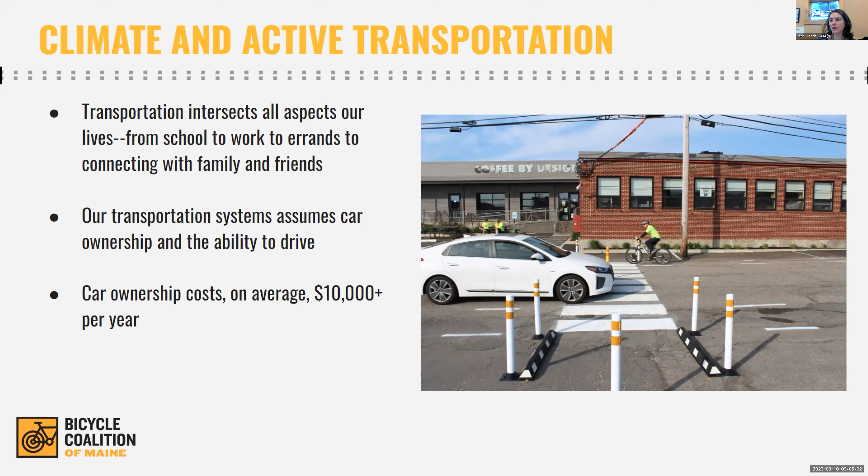Here in Maine, transportation accounts for about half of all of our carbon emissions, and of those, about 60% actually come from passenger vehicles. So the Maine Won't Wait Climate Action Plan, which I'm sure many of you are familiar with, has several key strategies in it to reduce emissions in the transportation sector. One of those is to reduce vehicle miles traveled by 10% by 2025, which is only 2 years away, guys, and 20% by 2030.

Some good, ambitious, but I think doable goals there to really get us out of our cars and reduce vehicle miles traveled. Another exciting plan: the state of Maine, for the first time ever, has created a statewide active transportation plan. The draft of it was released in late 2022 and is nearly final, but it really lays out a vision for supporting and investing in biking, walking, and other human-powered transportation. A really great step that the state has taken to lay out a vision for us here.

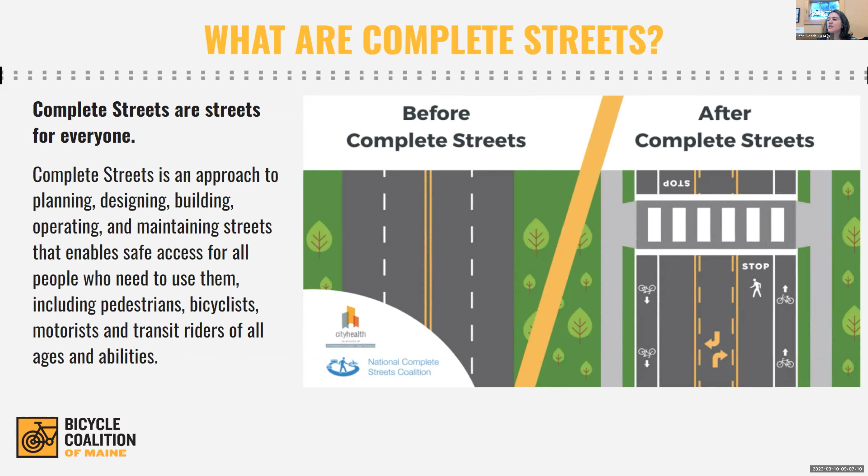And on the right side, you see we've reduced the number of vehicle travel lanes, added bike lanes, a crosswalk, sidewalks, and it's not only given space for other people outside of a car to utilize, but it also slows traffic down, which is really important for improving safety. So it's, at its core, a very simple approach to thinking about how we design our transportation infrastructure to support lots of different users.

And there's a lot of really great reasons why this investment is valuable to all of us. Top on my list is improving public health. One of the things I really love about being able to bike into work is that it embeds that activity in my daily routine, right? It allows you to have these walks or biking as part of it, and sort of gets that exercise and physical activity really as a core part of your day. And of course, reducing pollution and improving air quality.

And really improving the safety of our streets. Last year in Maine, we had record high roadway fatalities, and we're seeing this nationally as well. So there's a lot of work that we need to do to make our roads safer for everybody that's using them, but particularly for what's often referred to as the vulnerable user, people outside of their vehicles.

It also can be really valuable for economic development. Not only does it help people who are unable to drive, due to disabilities or low-income households, this design approach gives other ways to move around, allows people to get to work and have some economic independence in their lives. It really fosters communities and higher quality of life.

If you think about when you're walking or biking through a community, the way you can observe it and interact with it around you. Every time I'm on a walk or on a bike, you wave at your neighbors, you maybe stop and say hi, you pop into a shop. It really fosters a connection to the place that you live rather than just a drive through it. And I think that's really important for our communities.

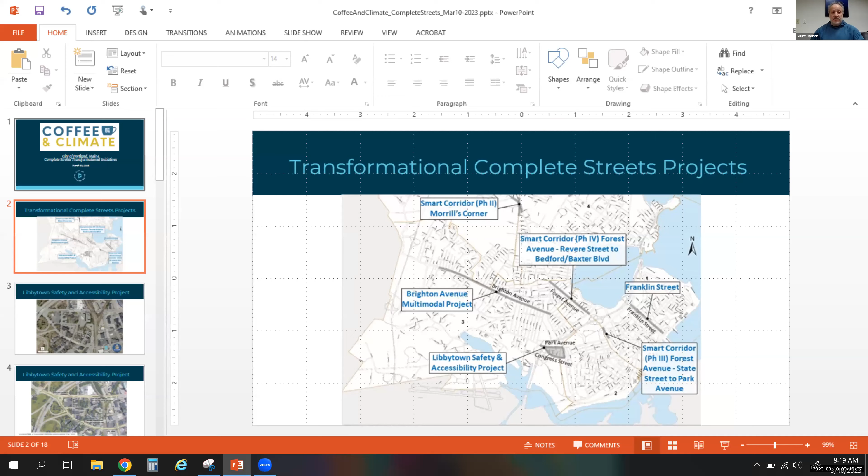Sounds good. Thanks for inviting me. I'm Bruce Hyman, the Transportation Program Manager in the City of Portland's Planning and Urban Development Department. I'm going to take you through some work that we're doing under the topic of today, complete streets, and hopefully my screen is going to be starting soon. Let's see.

Perfect. So Jean talked about complete streets and how some of the ways that we can transform some of our local streets and urban streets into more complete streets can be done in a more tactical and lower cost way. We do that in Portland, but I'm going to focus on a number of the more complete streets transformational types of initiatives that we have, and then close with a little bit of information on some of the work that we've done. I've got probably too many slides, so I'm going to move through them pretty quickly.

We went to the City of Planning Department and Public Works, went to the Sustainability and Transportation Committee Wednesday night to give them an update on some of our transformational projects. Six of them are noted here. I think I'm going to talk about three or four of them pretty quickly. But we've really been focusing a lot on Forest Avenue in the last 5-6 years.

If you know that, it needs a lot of work to become a complete street. We've been doing some of the more incremental stuff, paving projects and stuff, but we've got three active transformational initiatives, and I'll go through a couple of them: Brighton Avenue, then Libbytown, and then Franklin Street. I won't talk about that one - that one's an animal all unto itself.

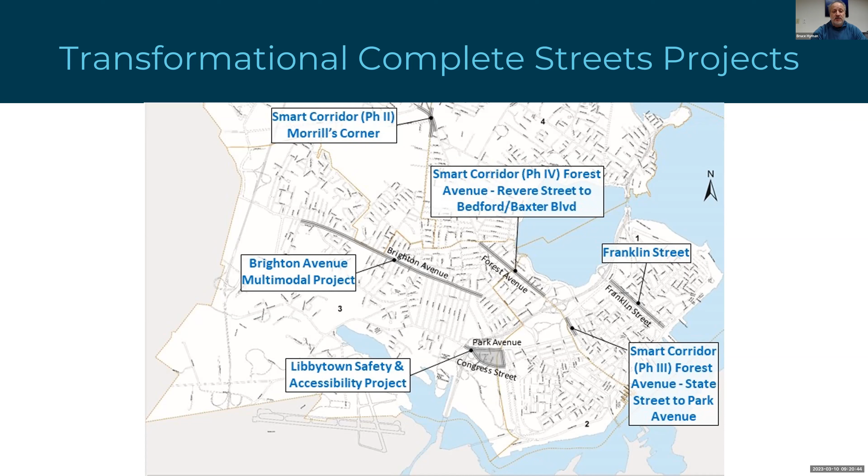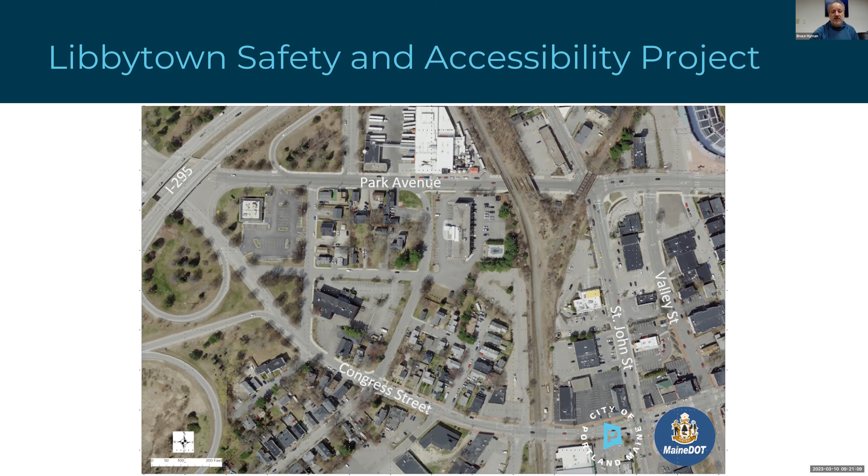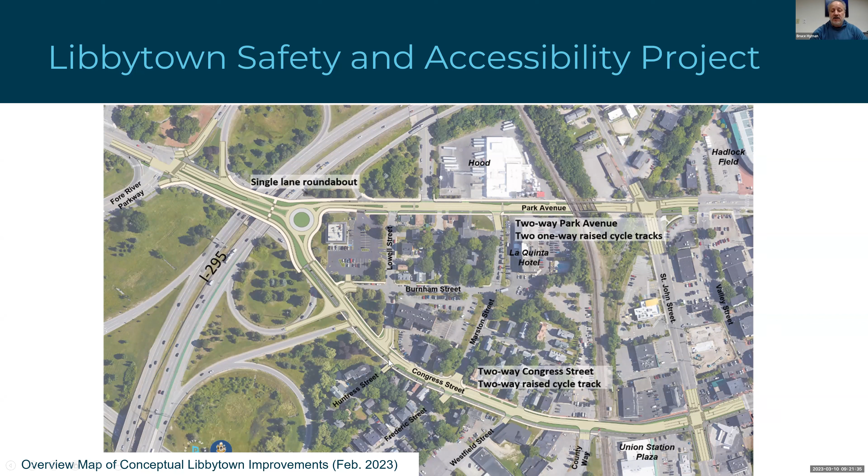Libbytown Safety and Accessibility Project - if you're familiar in the I-295 exit 5 area, Park Avenue and Congress Street are a 2-lane one-way pair. Just about every street segment and many of the intersections are high crash locations, and also have pretty bare bones bikeway facilities on both Park Avenue and Congress Street. So we're looking to, in partnership with the Maine DOT, retrofit much of the area in terms of converting Park Avenue and Congress Street to 2-way, introducing a roundabout where those 2 streets will come together, really upgrade the streetscapes of them. And as you'll see, we're looking to elevate literally and figuratively our bikeway design game in terms of introducing raised cycle tracks, both on Congress Street and Park Avenue.

On Congress Street, we're looking at introducing a 2-way cycle track on the south side of Congress Street that would go basically from within the project limits from Valley Street over to the Fore River Parkway, where we have a shared use pathway along the Fore River Parkway. So it's a pretty ambitious project.

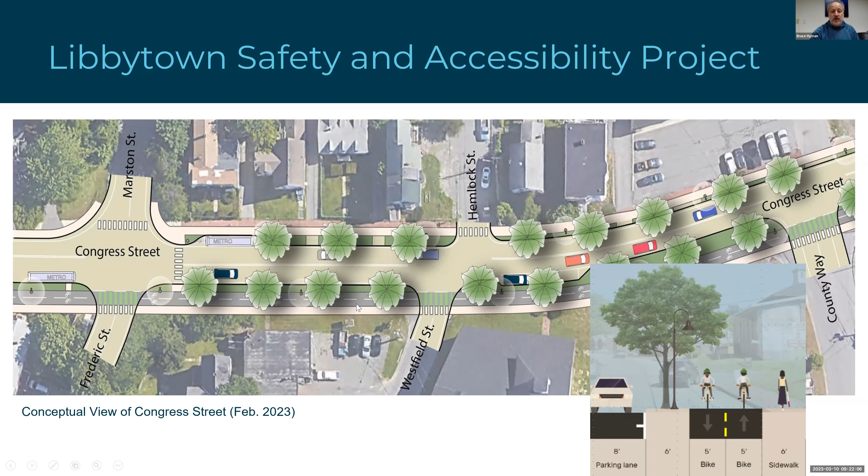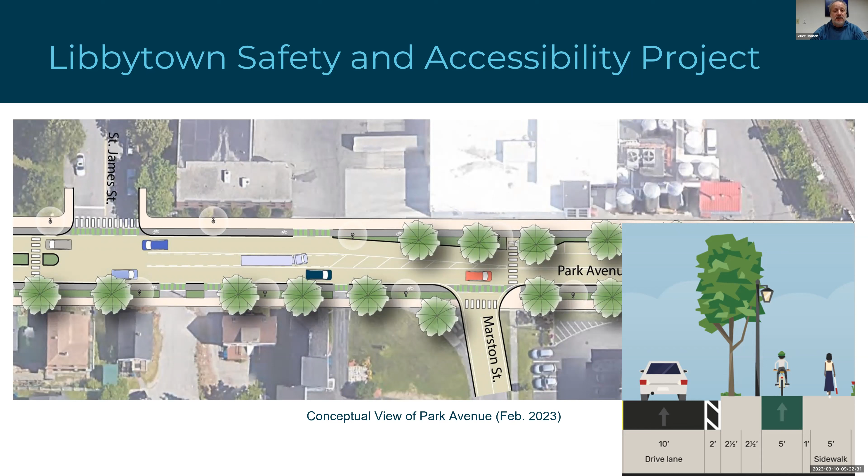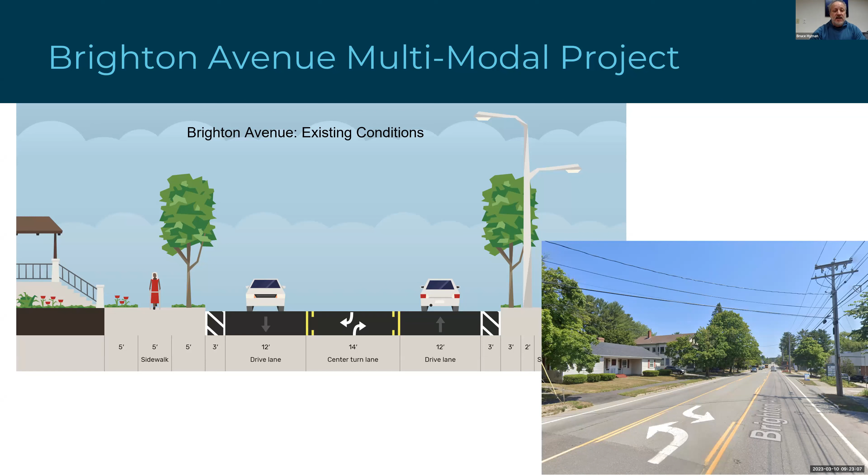I'm going to talk about Brighton Avenue multimodal project, basically from just north - just west of USM on Brighton Avenue - up to almost the Westbrook city line. Right now, it's a pretty bleak scape in terms of biking and walking. In some sections, there's kind of the two travel lanes with the center turn lane, but no bikeway facilities. Pretty poor streetscape and sidewalk conditions as well.

In an interim condition, with the money that we have in an impending paving project, we're looking to introduce buffered bike lanes and also enhance the streetscape, increase pedestrian crossings, access to transit. It's a very active transit corridor, and we have a rapid transit study going on that is looking at how we might retrofit the corridor with a high frequency, high quality transit operation from Gorham, Westbrook, and Portland, and Brighton Avenue is one of those possible candidate corridors that we're looking at.

If we're able to achieve and get and apply for some of the new federal money that's available for transformational type projects, we have a more aspirational type of bikeway facility where we'd like to have a two-way cycle track, sidewalk level, running along the length of Brighton Avenue.

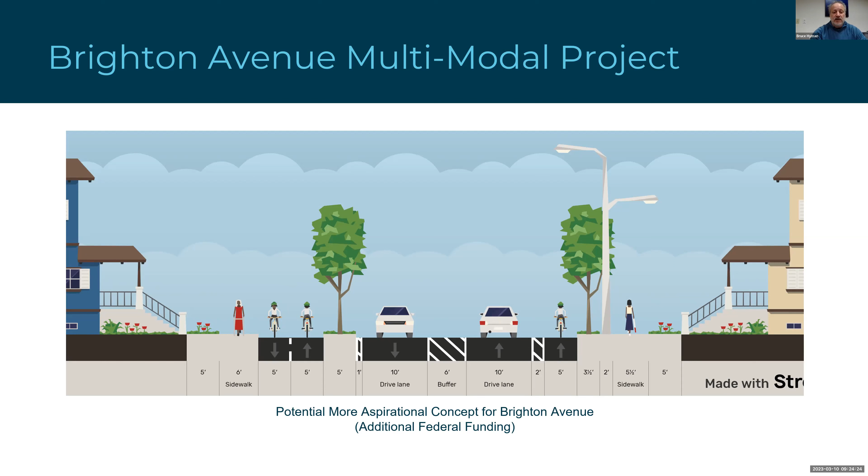And also, again, with those enhanced streetscapes and transit access features as well, but focusing on the bikeway features here in this presentation. In 2018, we completed the so-called Smart Corridor Study, which looked at Forest Avenue in Portland.

State High, and then across the Casco Bay Bridge, along Broadway into South Portland. It was a very ambitious study.

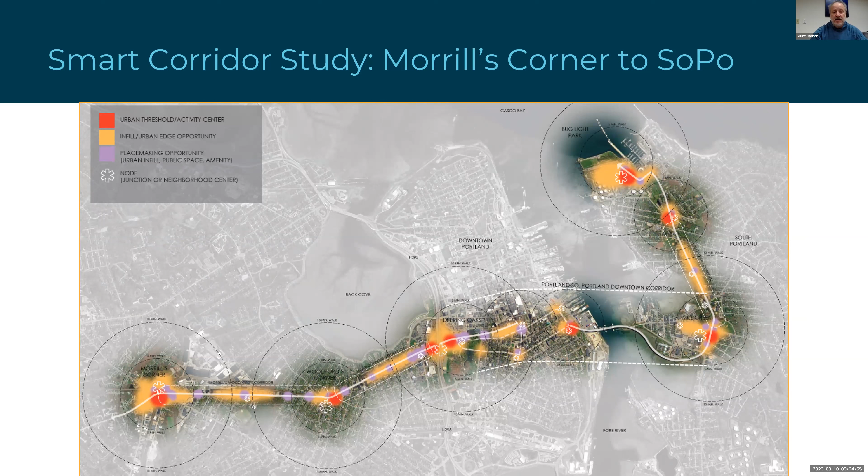I'm going to focus on some of the Forest Avenue outcomes from that, but we're picking away at it. We implemented phase 1 a couple of years ago in Woodford's Corner, and now we've got phase 2 looking at Morrill's Corner. Again, another pretty bleak streetscape with no bikeway facilities through Morrill's Corner, but with some connecting bikeways on Allen Avenue and to the south on Stevens Avenue, and some on Forest Avenue south of Morrill's Corner.

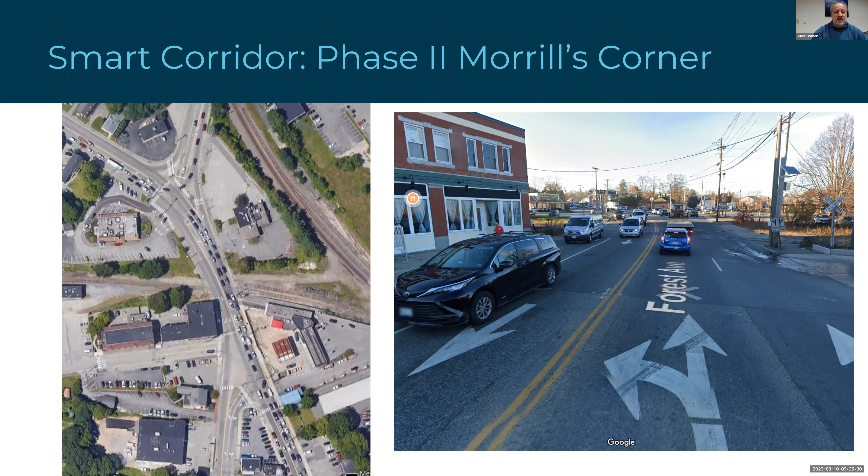But we're really trying to address this pinch point, which has been highlighted as a safety issue for cyclists for many, many years, as well as a safety issue for pedestrians in there.

Our concept is to bring raised sidewalk level cycle tracks through the area, really enhance the streetscape, redesign how Stevens Avenue comes into Forest Avenue, and create a plaza, making things more accommodating for all users. Right now, transit access is really difficult through this area, and we're looking at bringing transit stops within Morrill's Corner as well, so that you can actually transfer between the 9A, the 9B, and the number 2 bus. So really looking at all modes in this transformation.

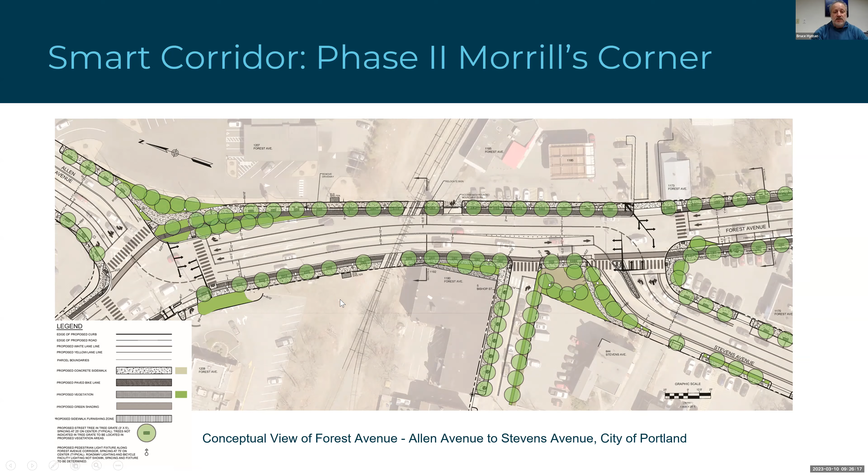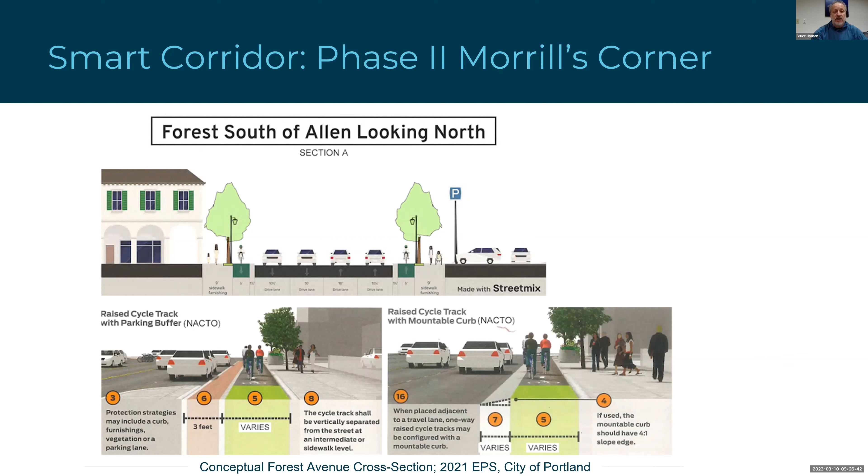These are some cross sections of those sidewalk level cycle tracks that we're looking to bring into the intersection, and hopefully we'll be able to continue them further south and to the north once we get through with Morrill's Corner. But we're picking away at things, and these are all $5 to $10 to $15 million projects, so we've got to do them in segments.

A little bit more to the south on Forest Avenue, from Woodford's Corner to the USM exit 6 area, again there are no on-street bike facilities for most of this way. The streetscape is very lacking in terms of there's no forest in Forest Avenue. So we're looking to enhance transit access and add more pedestrian crossings across Forest Avenue.

Part of that is going to be, we hope, a road diet where we eliminate one of the travel lanes, similar to what Jean presented in one of her slides, in terms of introducing a center turn lane. That would give us the opportunity to introduce, at least in the short term, a two-way cycle track along Forest Avenue, and also enhance the streetscape.

A goal in all of these projects is safety, pedestrian safety across the street, but also safety and accessibility to transit stops along this high frequency transit corridor.

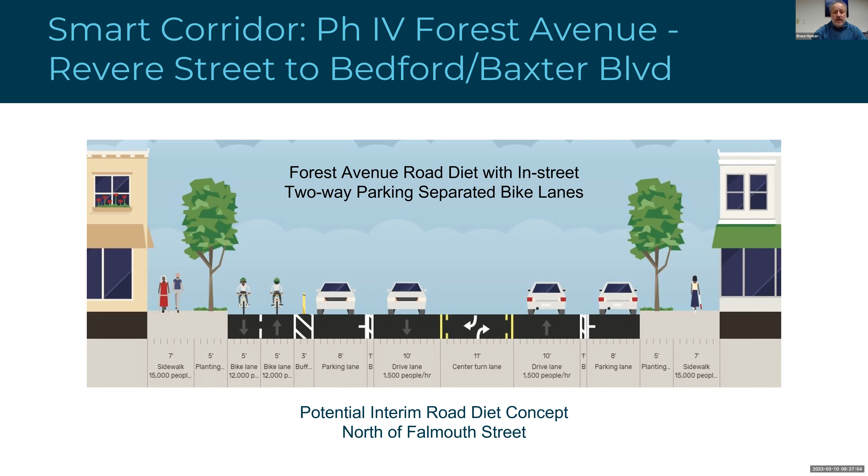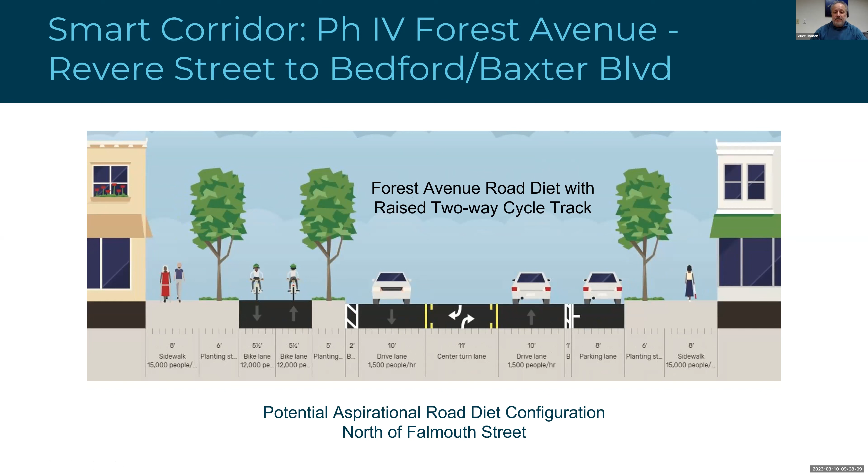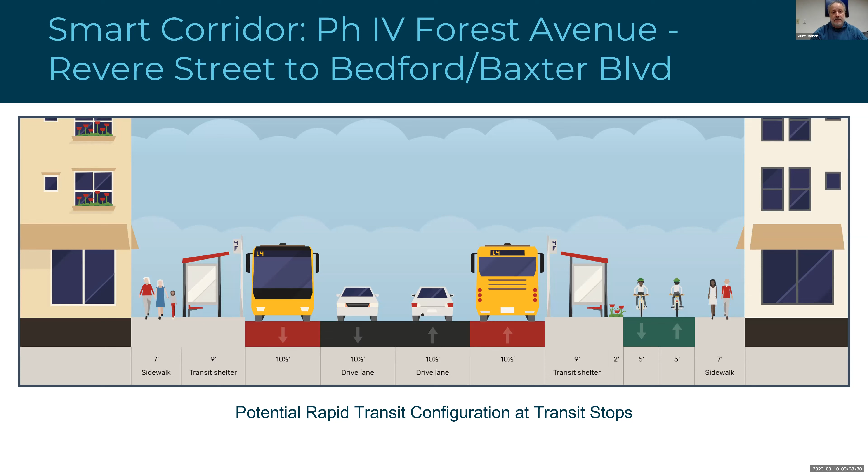More aspirationally, if we receive some of that congressional funding that's available that everybody's chasing after nationally these days, again $5 to $10 to $15 million required for these types of projects. Forest Avenue is also being looked at as one of those rapid transit corridors. So this is kind of the soup to nuts type of complete streets project where you're actually able to introduce dedicated transit lanes, raised cycle tracks, and enhanced streetscape elements as well. So we're going for it on a few of these corridors.

So those are just an overview of some of our transformational projects that we're trying to advance in concert with the Maine DOT. Those are multi-year initiatives and multi-million-dollar initiatives, but we also look for ways to incrementally and opportunistically enhance our streetscapes and complete streets.

Last year we initiated our Better Bikeways initiative, where we've got some of the more bare bones bike lanes on some of our streets, lacking in pedestrian accessibility across some of the streets. If you want to see some of the things that we're doing there, the URL is at the bottom of the screen. And I'll pass it back to Cashel.

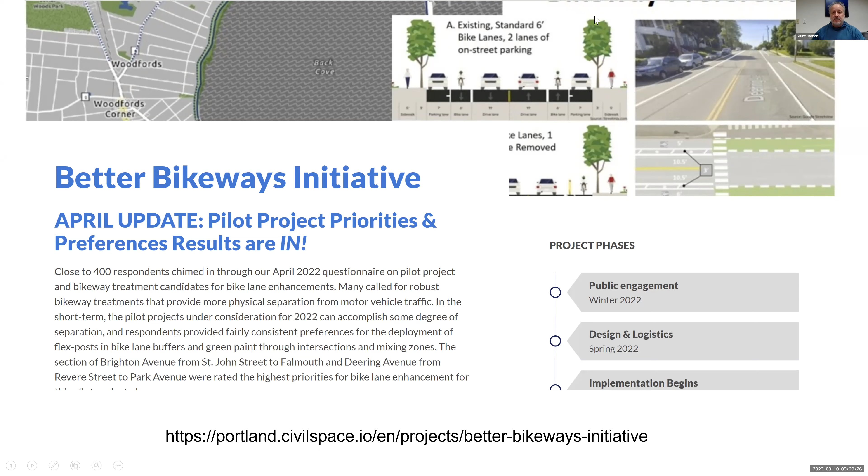All right, so I think that the main One Climate Future goal here is a mode shift goal, an overarching goal to move from our 12% sort of sustainable active transportation segment that we have to 26% by 2035.

Sounds close, but it's a lot of trips, and it's going to take a lot of work for people to feel comfortable and feel safe getting around those ways. And so that's the work we're doing, and you've heard a lot about it.

Some of the specific goals and objectives we have in the plan are to improve safety and accessibility of transit stops, invest in transit-friendly road design along those transit routes, and create policy pathways for strengthening transit-oriented development, which enables density and developers to build with transit in mind.

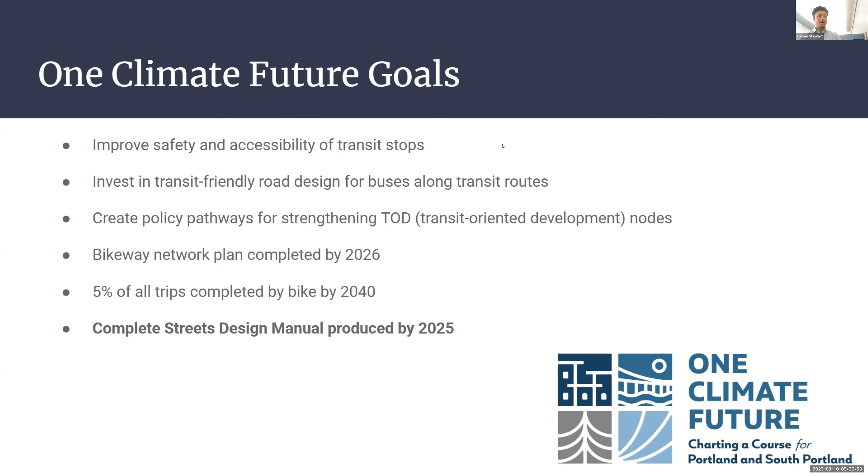We want to complete a bikeway network plan by 2026. There's a specific mode shift goal for bikes to get up to 5%, which is at about 1%, if that, right now. And then a complete streets design manual produced by 2025 — that's something I'm going to talk about in a little more detail here.

The city ourselves passed a complete streets policy in 2017. You heard from Jean that there's now a regional complete streets policy, and there's also a state complete streets policy. But our local one committed us to thinking about every mode of travel in our design and ensuring they're included. We never really had the tools to do that, or the guardrails that said when we really needed to be doing these things — money aside, because usually money is the limiting factor.

So we got a community action grant from the Governor's Office of Policy, Innovation, and the Future to fund a street design technical manual, we're calling it. But in a lot of ways, it's a complete streets manual. We chose Toole Design Group to do that work — they're a company out of Boston very familiar with doing these complete streets manuals. We just started this past month, but it's going to be about a 10-month project with completion in November.

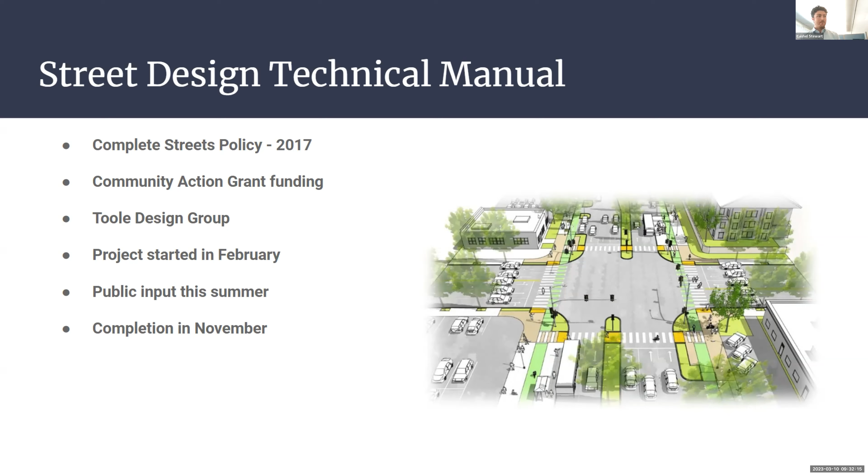All the while, they'll be taking what they know about complete streets and connecting it to the context of South Portland streets. So it's going to start with a road classification effort where we look at every road segment in the city and pick the category or typology we want to see there.

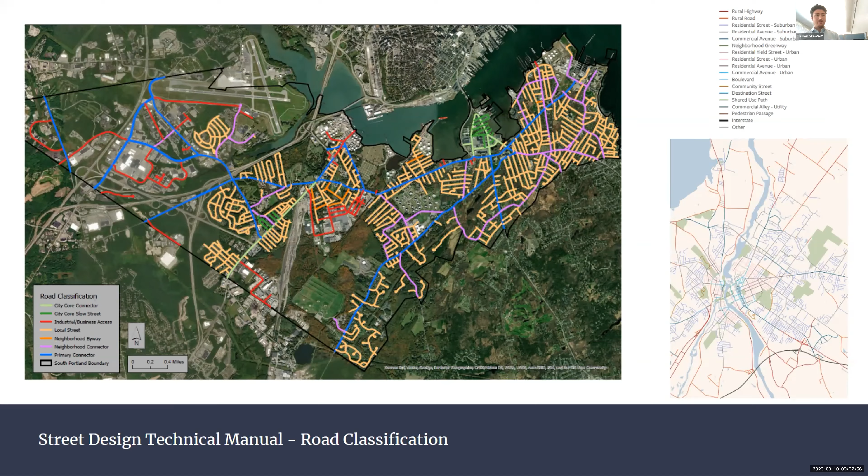On the left, you see preliminary work we did for road classification in South Portland. On the right, you see the final version that Auburn, Maine did in their Complete Streets manual, I think last year. You can see some of the names of the street types: city core connector, local street, neighborhood connector. That's the lens we're going to look at each of these roads through, and from there develop cross sections and features we should be adding to each of the road typologies.

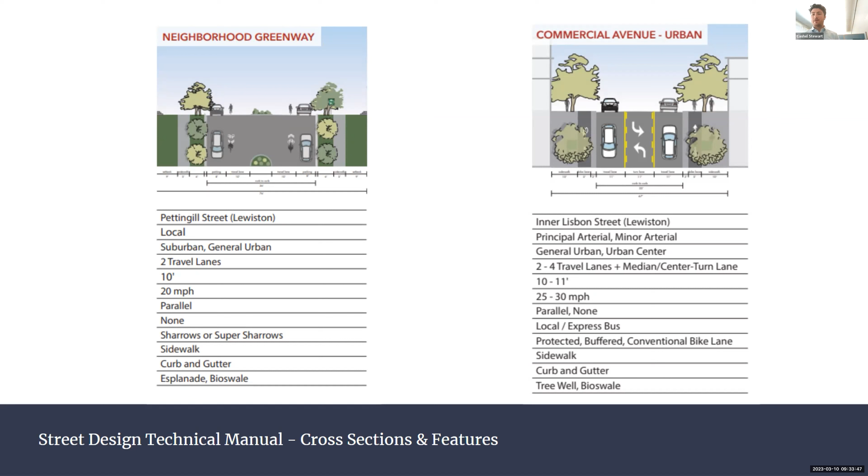But you can see they're going to provide what's required of us in those roadways, and then what's recommended, and we can pick and choose from what they call — again this is Auburn's — a Complete Streets toolbox. The list of treatments for walking and biking facilities, recommendations and where they should be seen, and the situations where they make sense versus not.

I flashed it on the screen earlier, but this whole summer we're going to have a public input piece where the plan will be half done, and we'll bring it to everybody through a public meeting, survey, and some of our committee meetings, which anybody can show up to, and talk through this plan and see how we can apply it to South Portland and use it to our benefit. So keep an eye out for that.

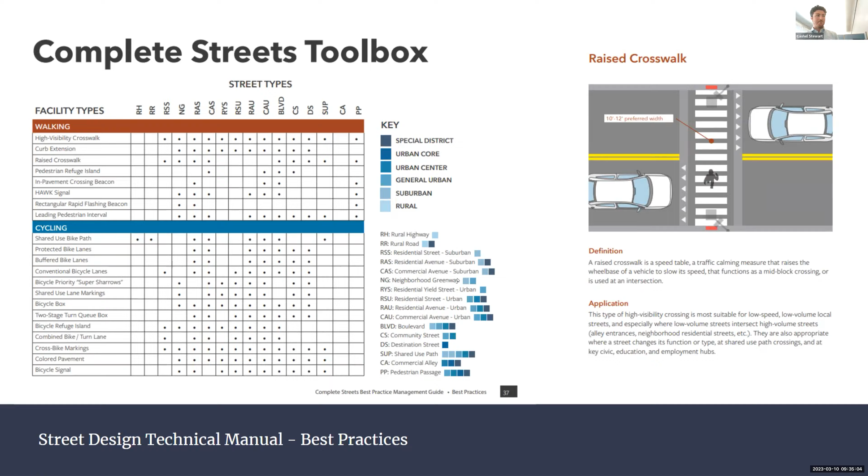Complete Streets, though — we're not building a lot of new streets here in South Portland. So it's a lot about how we can retrofit our existing streets to make them more complete and be thinking about every mode in our design. A lot of that starts with opportunistic planning and trying to take the most problematic places, or places where most people travel — arterial roads — and trying to make them more complete.

So here are a bunch of the projects we have going on in South Portland. This coming year, we are going to see a ton of pedestrian improvements along Cottage Road, all the way from Reds to the Cape Elizabeth boundary. It's mostly ped improvements, but there'll be paving, and in that effort, adding a bunch of curb extensions, which will improve crossing all along Cottage Road for pedestrians.

We have the third phase of our Westbrook Street multi-use path that we just got funded. That's going to be from Exit 3 to Redbank. Right now we finished the Exit 3 to Westcott Road section, which is a critical connection from the west side to the east side. It's the only connection, and before that multi-use path, it was really hectic getting across.

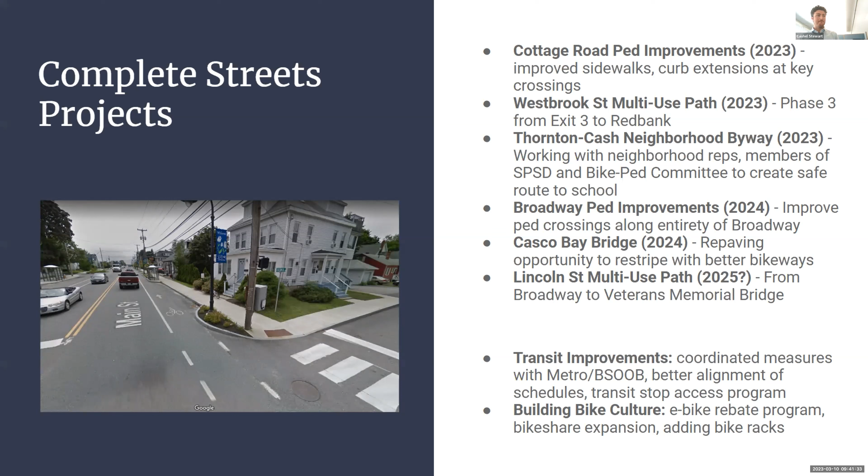And then last slide, and then we'll open up to questions, but I wanted to mention some complete streets oriented plans that are going on. I mentioned the street design tech manual.

At the regional level, GPCOG is working on a Vision Zero action plan. This is a roadmap to zero deaths. They're not just looking at active transportation, the non-single occupancy vehicle world, but the whole picture, saying how can we reduce traffic deaths through behavior, through design, through emergency response.

And once we complete the plan, it will free up the ability to apply for a Safe Streets for All grant, a new grant program from the Bipartisan Infrastructure Law. It has potential to be a really substantial influx of money to high crash locations in our community. So kudos to GPCOG on working on that plan so we could go for those grants. Regardless, I think that plan will be a really great one to point to.

South Portland is working on a comprehensive plan update. It's going to look at the entire city and vision setting for the next 12 years in South Portland. It does include a robust bike ped transit component, and it's a huge part of our vision for the next 12 years. Keep an eye out for public engagement opportunities this summer. They're doing a ton of public meetings and surveys to provide input and make your voice heard for how you want these things to look.